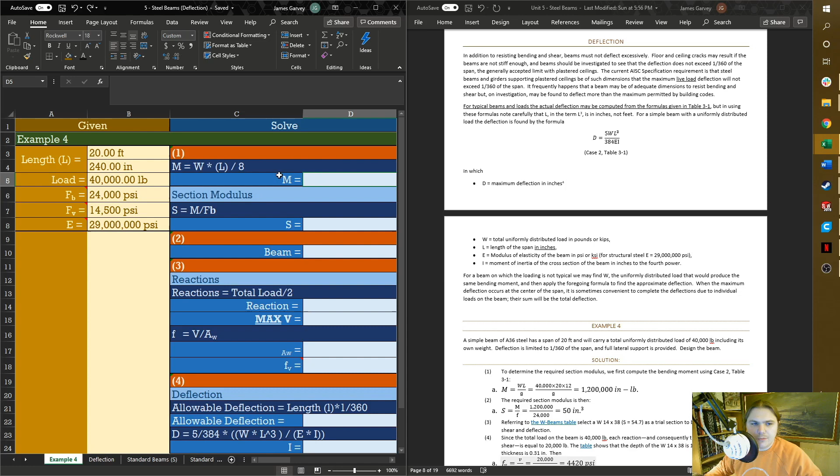So if you go to Unit 3 text and go down to the table at the bottom, that equation for our maximum moment for a uniform distributed load is case 2, which is our maximum moment equals our total load, the big W, times length divided by 8. Let's switch back over to our sheet here, which I've already put into the example portion of the Excel file that I'll be providing. So I'll take our total load times our length in inches, because we're going to want inch pounds, divided by 8.

And then from there, now we can solve for our section modulus, which is our maximum moment divided by allowable bending stress. So equals this divided by the 24,000 psi, because we're still going to be using the A36 steel. And so our section modulus is 50 inches cubed.

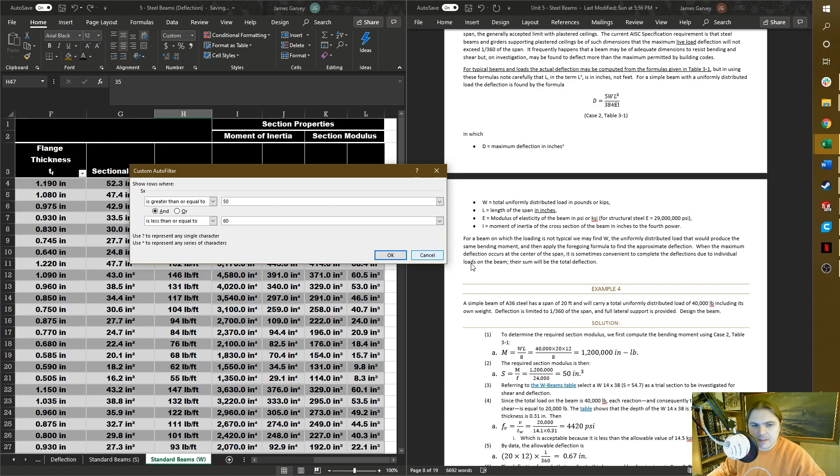In the text, they're going to use a 14 by 38. When I go back over here and kind of filter that out, there is actually a lighter beam. So I'll go filters between, I'll put 50 here, and then let's just go about 10 above that to give us a good selection. And you can see that we have a 35 pounds per foot, which is the 18 by 35. But let's just continue on with using what they used in the text. So let's just say that for whatever reason, they had a limitation on height. So 18 would be way too tall for whatever they were constructing. So we'll do 14 by 38.

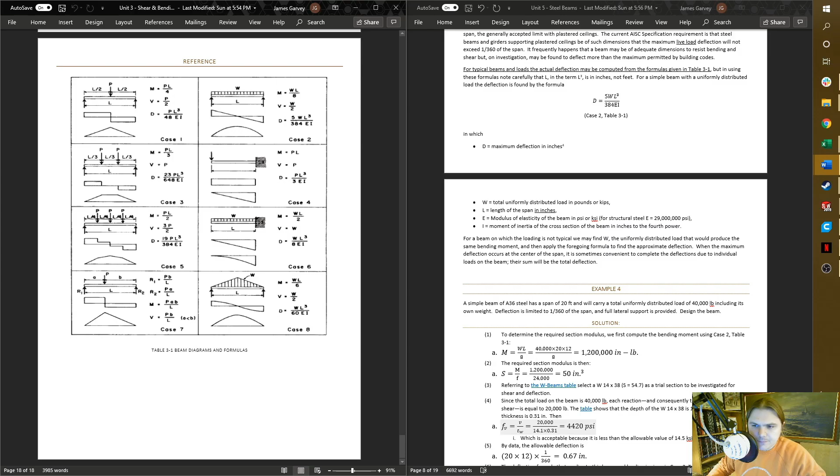So swap back over here. Scroll down to 14 by 38. Went a little too fast there. There it is. Our reactions, if you can find those with the equation on table 3.1 from unit 3, which is going to be not our reactions, our maximum shear, which is just our total load divided by 2. I'm gonna skip reactions on that. So it's just our total load, because they're the same, divided by 2.

Our AW, which is the area of the web of the beam section. So we'll swap over here. Oh, 1 second. I'm going to press equals, click on here, and our web area, AW. So that's a 14 by 38. Click there. And then our shear stress is going to be our maximum vertical shear divided by our area of the web, which is below the allowable shear stress of 14.5 KSI or 14,500 PSI.

So I already said that our allowable deflection is our length times 1 over 360, or just length divided by 360. And this is going to be in inches as well. So that is 240 divided by 360. So the amount of sag is going to only be 0.67 inches, which I got that actually formatted wrong. Let's fix that. Okay, we'll put in our moment of inertia. It's a 14 by 38, right here.

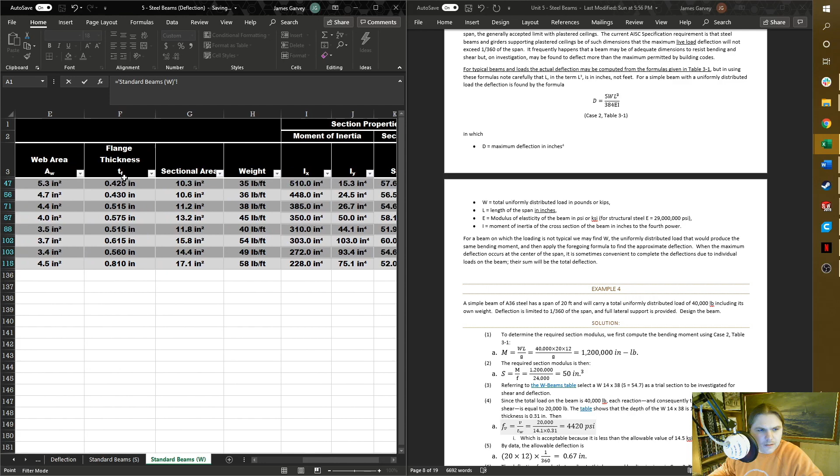And then our deflection equation, which is also in the case 2 of Unit 3, the table on Unit 3, or I have it listed out here. It's a little different than the table, but it does the same thing. So we're going to take a constant of 5 divided by 384 times our total load times our length in inches cubed divided by our modulus of elasticity times our moment of inertia.

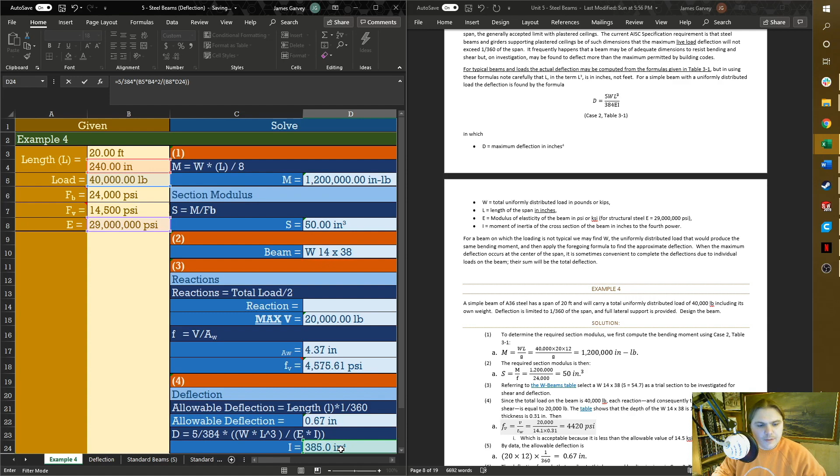I finished off with my parentheses there, and I must have done something slightly wrong. Oh, I only squared it. Let's make sure I didn't miss anything else here. That should do it.

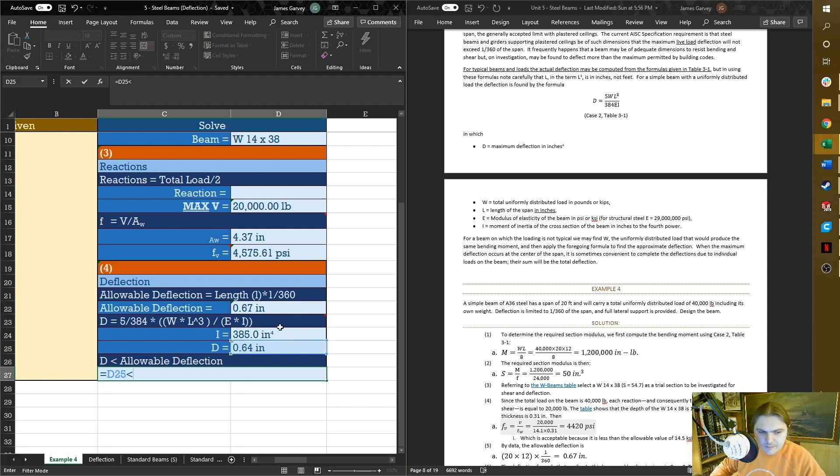Okay, there we go. So this particular beam will only deflect 0.64 inches under that load, which is underneath the allowable deflection. So just to visually show it, our deflection is less than the allowable deflection, which is true.

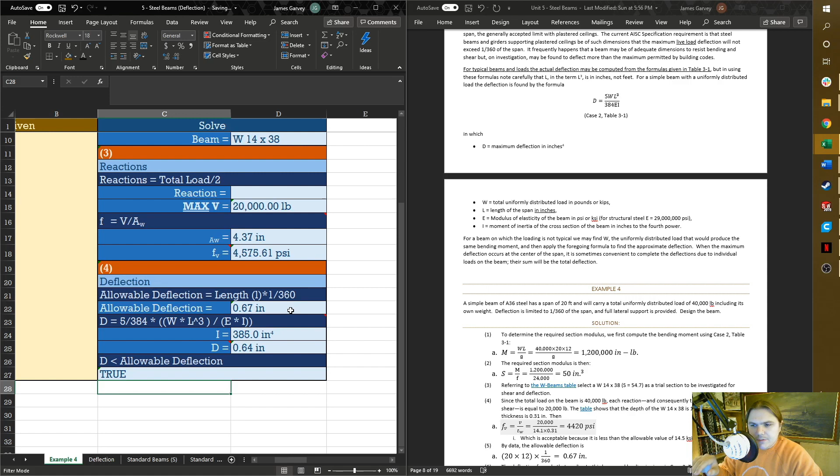So I'm going to jump over to SolidWorks here in a second and show you how to check that using SolidWorks to make sure that your beam selection is correct. All right, I'm going to show you how to use SolidWorks to check for beam deflection. I got a new file open here, so I'm just going to run through how to do this again.

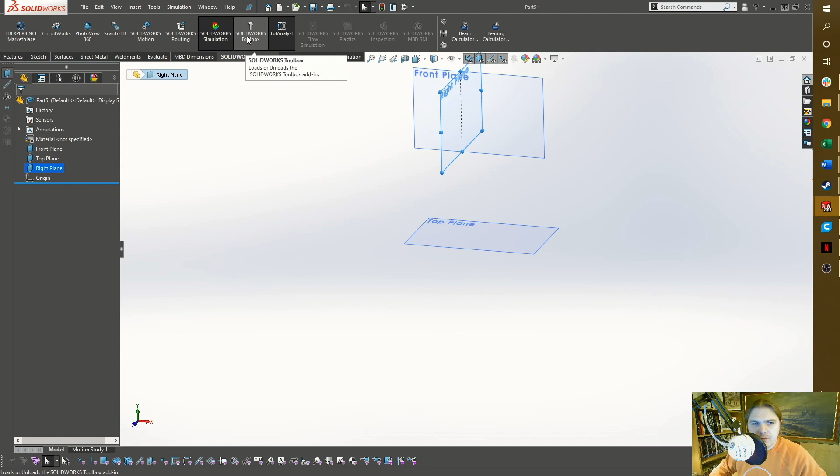I'm going to select the right plane because that's where I want my section to be. I'm underneath the SolidWorks add-in, and I have the toolbox selected, which brings up these options, and I'm going to click on structural steel. I already found 14 by 38 in the list, but you'll have to scroll through if it's not already selected. I'm going to hit create, and it's going to run through some stuff, and I'm going to hit done.

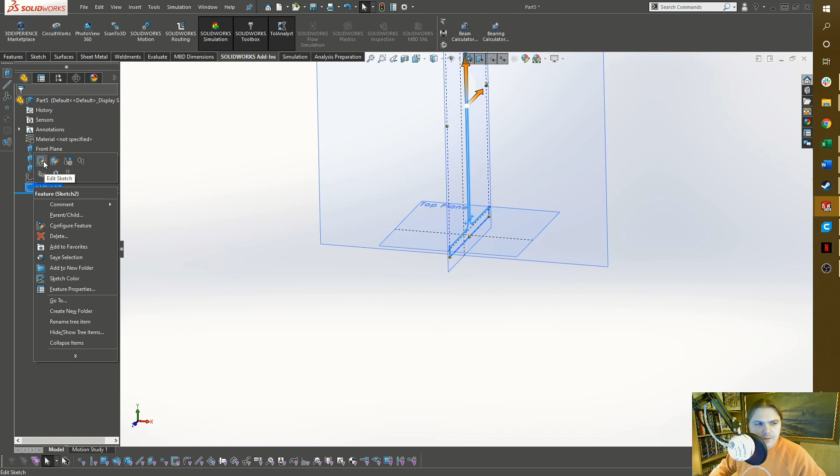I'm going to get it fully defined. I'm going to select this line, the origin, and make it midpoint, and I'm going to make this horizontal. Now I'm fully defined. Exit out of that. In this case, I really don't need to do much more because this is a distributed load, so I don't need any points or anything like that, so I'm just going to extrude it.

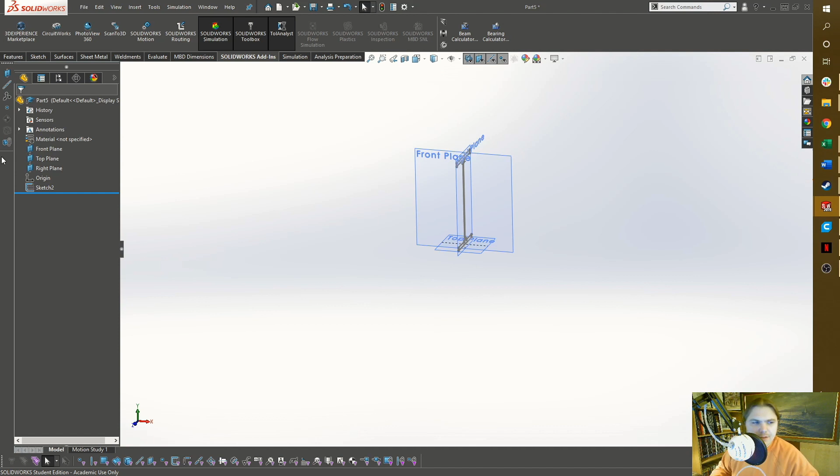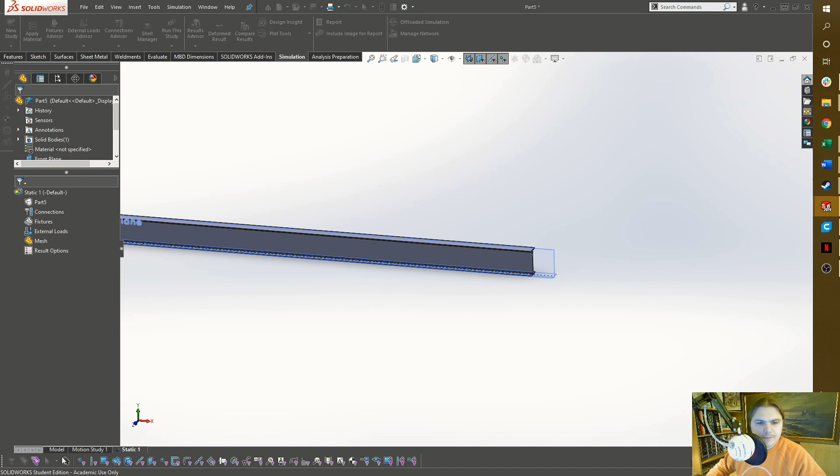Extrude, I believe it was 20 feet or 240 inches. So let's just put 240 inches here. Hit the check. Here's my beam. I'm going to go back to the add-ins here, and go to simulation because I already have that up. Hit new study. Hit the check. And then run through the process here.

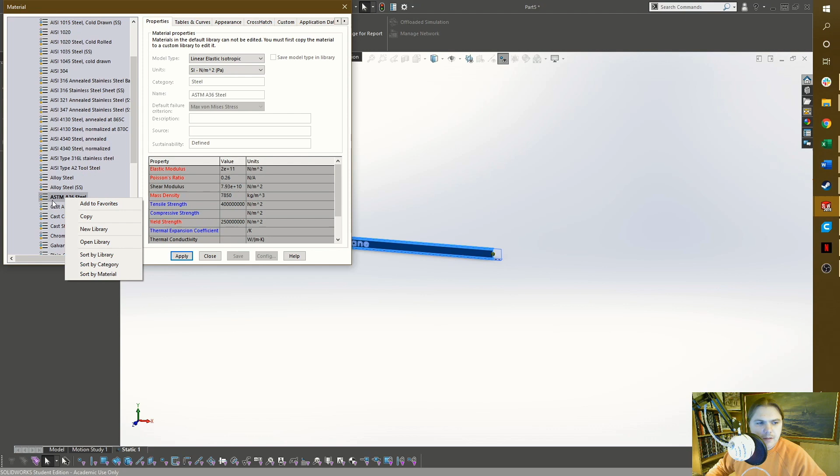So on the first one here, I'm going to right click, treat as beam, right click again, and I've added this to my favorites, A36 steel. Otherwise, click on apply, edit material, come down, find your A36 steel, and then you can right click on this and add to favorites, so you don't always have to come in here. So since I'm already here, I'm going to hit apply and hit close.

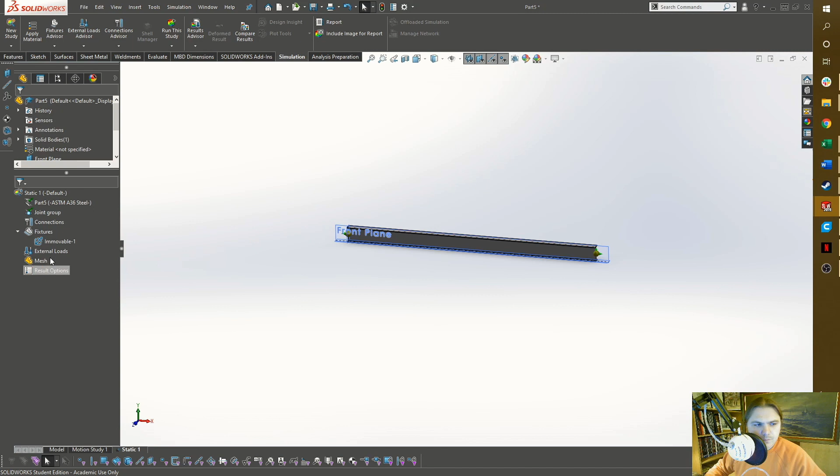I'm going to now apply where the supports for this beam are, which is underneath fixtures. I'm going to right click, fixed geometry, immovable, click here and here, because that's where it's supported, and hit check. And then the last step is to apply my load of force.

Click on the beam icon, select my entire beam, apply the direction, which is going to be about the front plane, and the load, which was, I believe, 40,000 pounds. Let's double check to make sure that was true. Yep, because that was 20, so 20, blah, blah. All right, good to go. I need to reverse direction. As you can see, the arrows are pointing up. This is a downward force. There we go. Check.

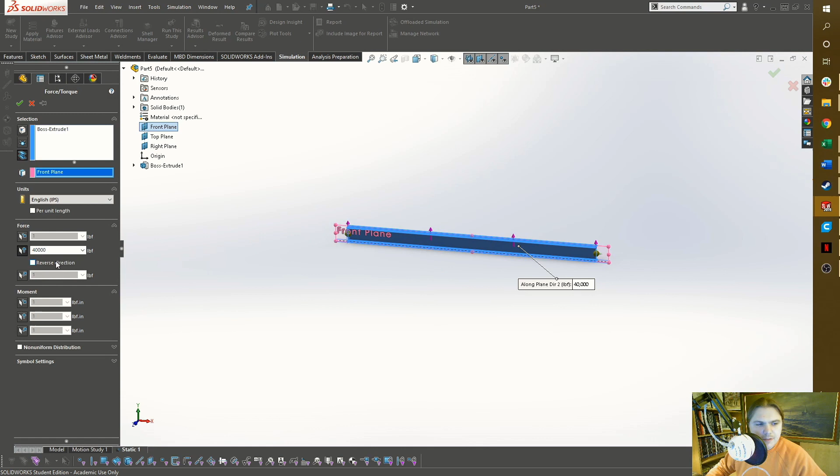I'm going to right click on static, and I'm going to hit run. So as we can see, our bending stress is below our allowable bending stress of 24,000 psi. We already have our displacement on here, but before I click on that, I'll quickly just show how to get our shear and moment on there.

So I would say it's a good idea to quickly just do these, so you can see if these are off from your other calculations. Then you know you have to go adjust something in either Excel or SolidWorks.

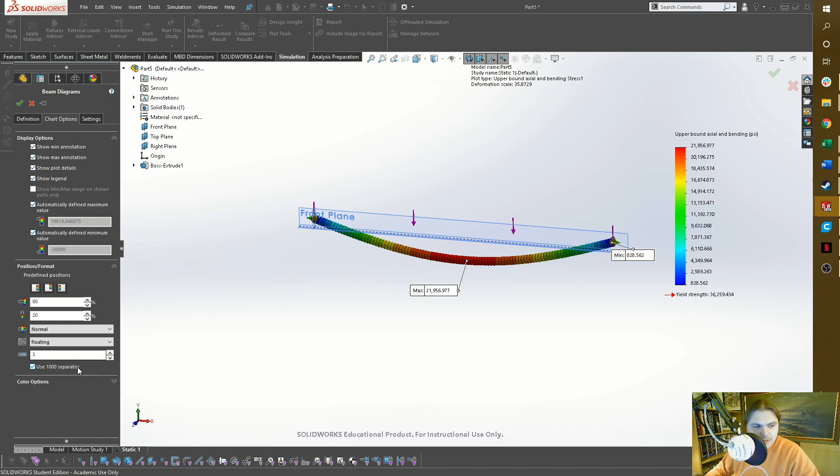So I'm going to right click on result, go to define beam diagrams. I'm going to get the shear on there first. So that's shear force in direction 1. Change it to pounds. I have all this set up in my settings to already have the settings I need. So that's good, and I'm going to hit check.

So that matches up with what should be our shear diagram. Right click again, define beam diagrams, and I'll go pounds again. Well, actually, I'm going to do moment about direction 2. If direction 2 doesn't work, try direction 1. But usually, if you've set it up in the way I've done it, direction 2 is the one you want to use. Everything else is set up.

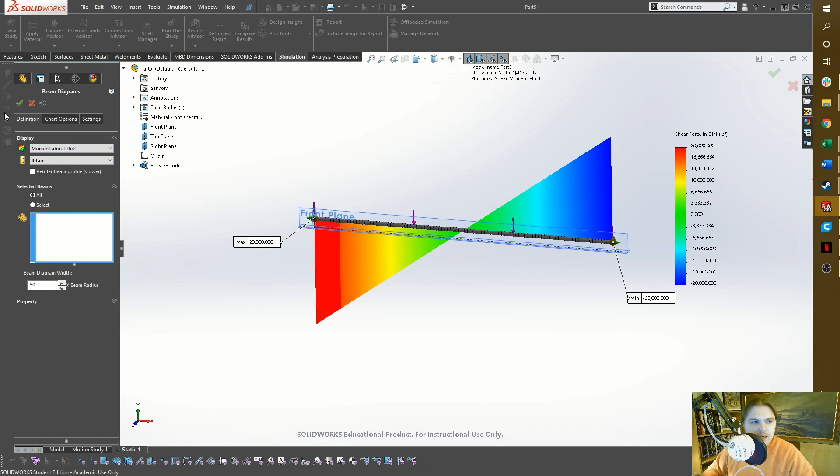I'm going to hit check, and our moment is the same as what we calculated, mostly. I'm going to double click on displacement here, and it's going to be a little bit off, but it's close enough. So double click, and we got 0.669, and our allowable was 0.67. So this should work.

I would almost guess that if you got this kind of close, well, obviously if it went over what our calculated was, we're using a lot of rounded numbers with our calculations. So maybe try a different beam, maybe a step up above it, and see what that gets you in the end.

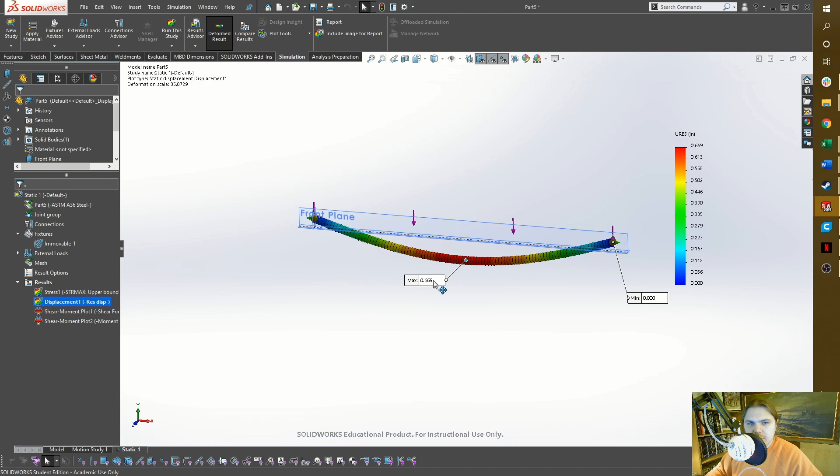So now I'm going to go to another example here with a little more complex load type and show you how to go about that. So I came up with this random problem here where I have a 14-foot beam. I got 3 concentrated loads at some random spots, and then a uniform load across the entirety of it.

I've gone through, I've calculated my reactions, solved for my maximum shear, and used that to find out where my vertical shear passed through 0. Where that happened, that's where my maximum moment was, so I calculated that. So I've done all that, found out what my section modulus was, selected my beam, and I was able to find everything else I needed to know.

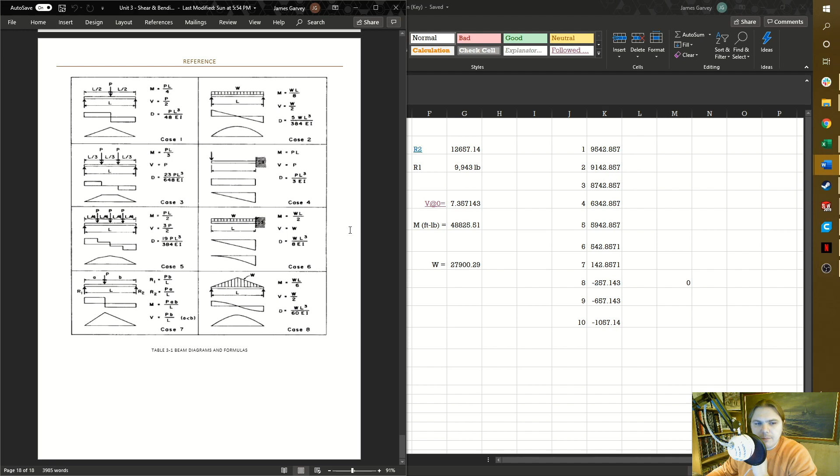What I didn't know is how to necessarily calculate the deflection. If you look at the table on Unit 3, there isn't an equation for calculating a random layout like this. The math to do that accurately is probably beyond where we're at right now. So I'm going to show you how I handled this. I used case 2 and basically converted the load on this beam into a distributed load.

So taking our equation here, M equals W times L over 8, I know my maximum moment and I know my length. What I don't know is big W. So I moved things around. I took my maximum moment times 8 divided by my length, which gave me a W of 27,900.29 pounds. Now I can plug that number into this equation: 5 times W times L cubed divided by 384 times E times I.

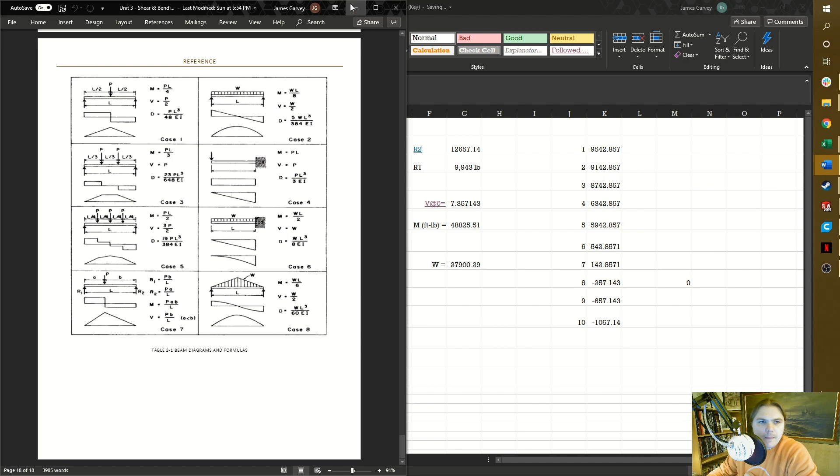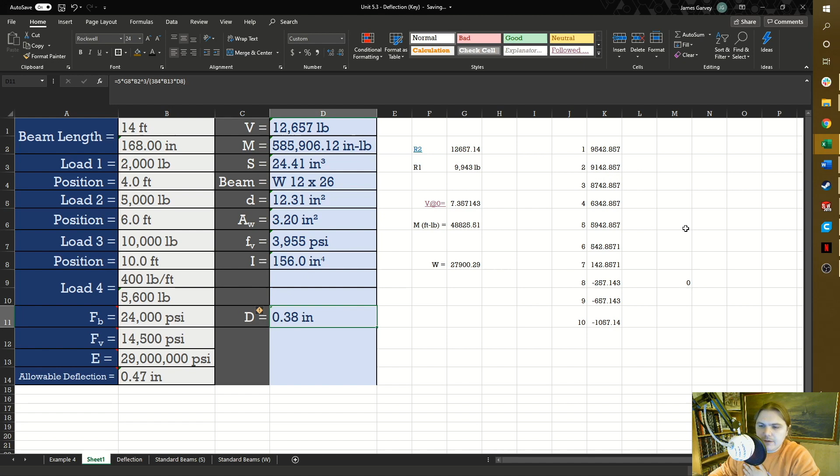So my allowable deflection was 0.47, and my calculated using that is 0.38. Now if I check that against SolidWorks, I did 2 studies on this. I did the study using the concentrated loads and the distributed load to see what my result would be. And if I double click on displacement, that's 0.399,

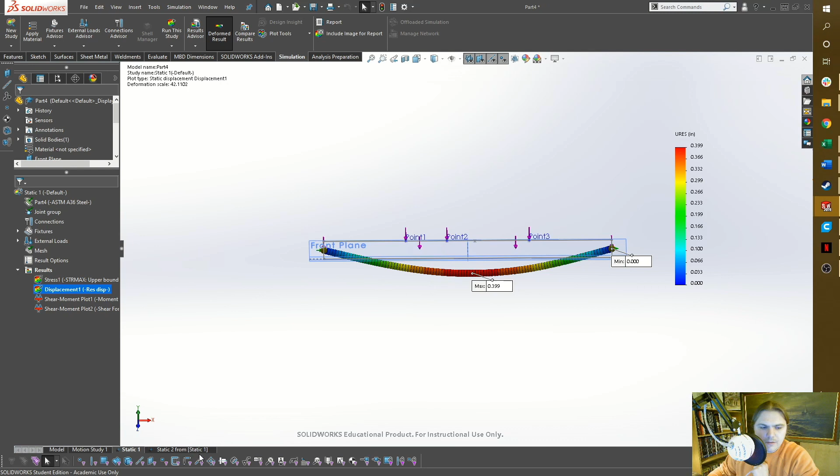which is still below my allowable, which was 0.47. And then I also did a study using my calculated distributed load to see what the displacement with that would be. I clicked on the wrong thing here, and that's 0.397.

So similar numbers. So that's the way I got around that, and it seems to work out just fine. I think there's only one problem where you're going to have to do something like that. So give that a go and see what you get for an answer from SolidWorks, and it should work out just fine.